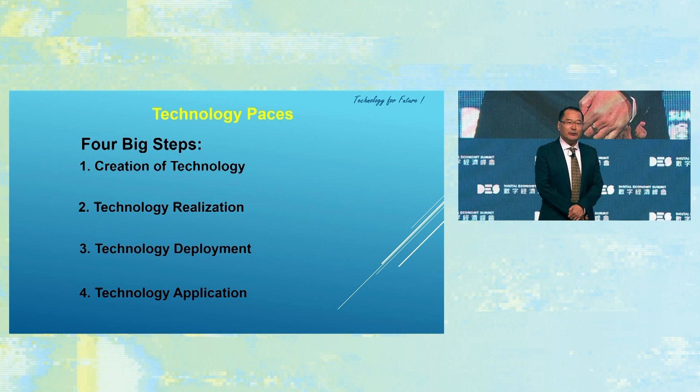Actually, after reviewing the technologies, we have creation of technology, technology realization, technology deployment, and technology application. The most important is the technology created by human beings. How to realize it is touchable and sensible. And deploy, how to deploy, so everyone will learn the technology more easily. And how about the application?

The first creation of technology is originated by human beings. From thousands of years ago, ancient people used stone as a tool for earning a living and fighting the beasts. Secondly, when coming to the farming stage, farmers used the plow and harrow. After this age comes the first industrial revolution stage, the first knitting machines, what we call the machinery stage.

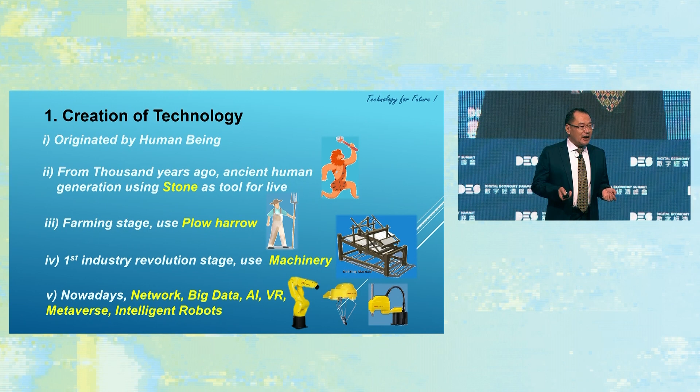But nowadays, what are we talking about? We're talking about the network, big data, AI, VR, and the metaverse, something like that, and the body of execution, what we call intelligent robots.

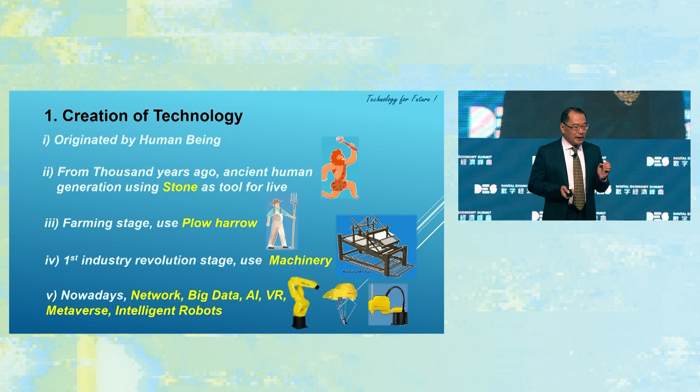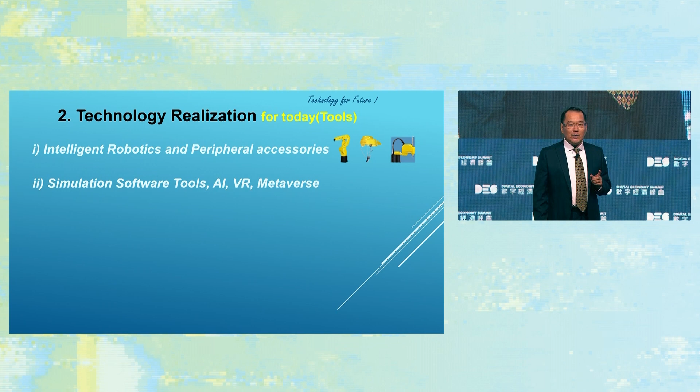Technology realization mainly depends on the execution of the body, what we call the robots and peripheral accessories. And how about the brain? The brain is the simulation software tools, for example artificial intelligence, virtual reality, VR, and the metaverse, which is now a very hot topic.

And by mixture of big data, like SCADA, which means the interface between the front-end body and the upper levels like MES and ERP inside a factory, a very big enterprise. And how about the digital factory right now, or digital twin? This is a very hot topic in the existing world.

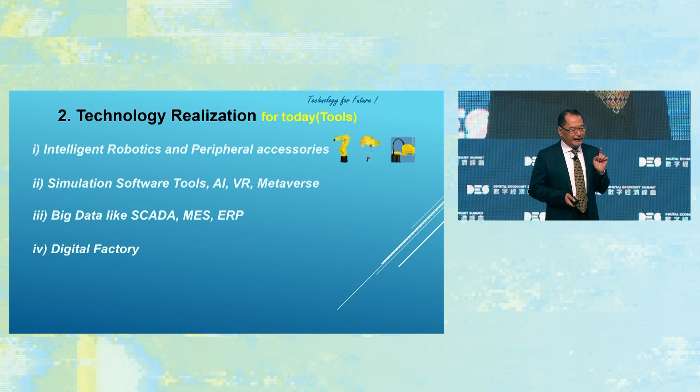And the above elements form Industry 4.0 and realize technology, becoming humane and laymen, touchable and sensible.

And how to deploy? This is very important. After creating something, we need to use it as a tool to help us make things much more efficient. Just like your mobile phone, iPhone is using the iOS operating system, and Android using the Android operating system. Then you can play Facebook, install WeChat, and install many other tools.

And then creating the technology application platform for laymen. The platform is very important because the professional guys already have the idea and expertise to create a platform for layman use.

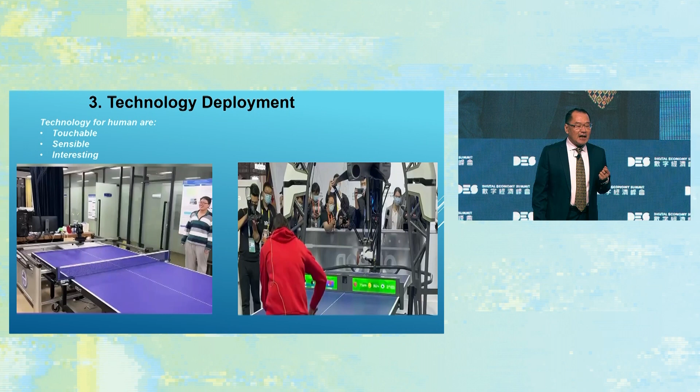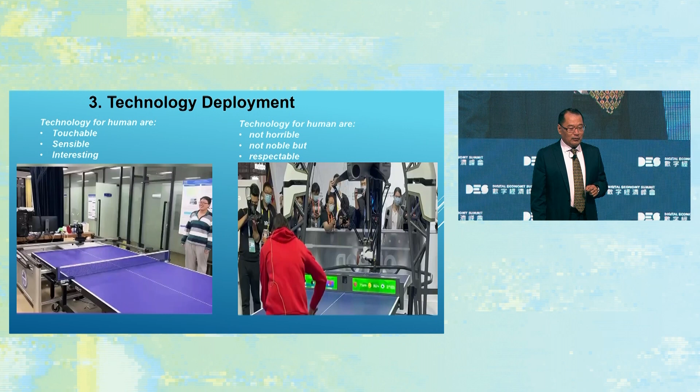How to make everything accessible down to the layman level? We just make the technologies touchable, sensible, and interesting to human life, which is very important. Making the technology not horrible, not noble, but respectable, just like doing ping pong, something like that. So we can make the technology interesting, merged together in your life.

Okay, and how to apply, in what way and how? First of all, we think about technologies that can create something human-like, the body is the hardware, and the software is the brain. The body includes the intelligent robot system. What is the definition of intelligent? We will discuss this later on.

This also includes AGVs, which you've seen before. Even in a restaurant, you can see robots traveling around taking dishes for you. Then there's computerization, the logical thinking hardware, making use of controllers and servers for database storage. The software is the brain, handling logical thinking and control programs, data manipulation, and now very popular is artificial intelligence, virtual reality, digital factory, and even the metaverse.

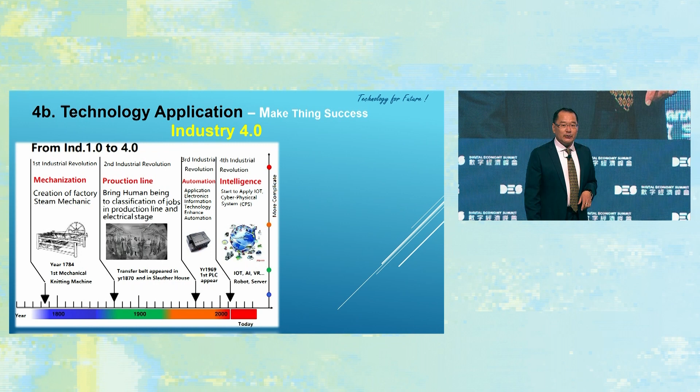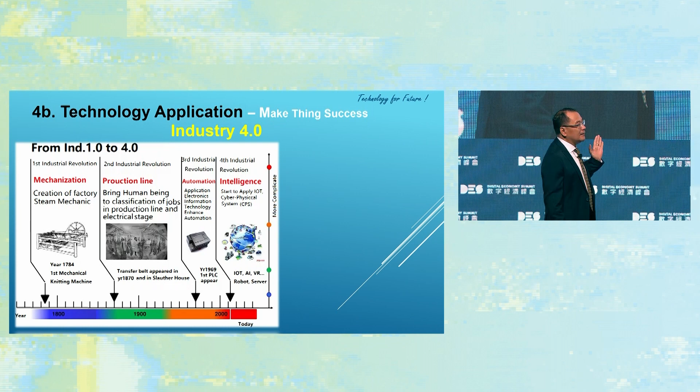So we can shortly review Industry stages from 1.0 to 4.0. You can see in year 1784, this is the first textile machines that appeared in the world, so what we call mechanization. Then after one century, it becomes the production line concept.

That means there's a group of people in the production line, sitting here to produce something, with job classifications divided piece by piece and linked up together. This is the production line concept.

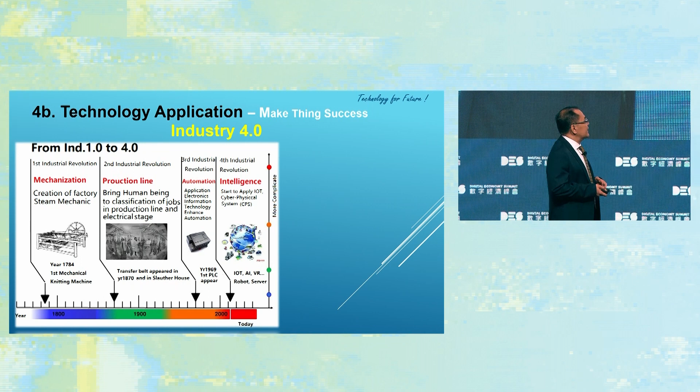And then after another century, automation becomes very popular. In 1969, the first programmable logic controller, which is the hardware of the brain, appeared. And then until now, what we're talking about is the Industrial 4.0 revolution, which is intelligence.

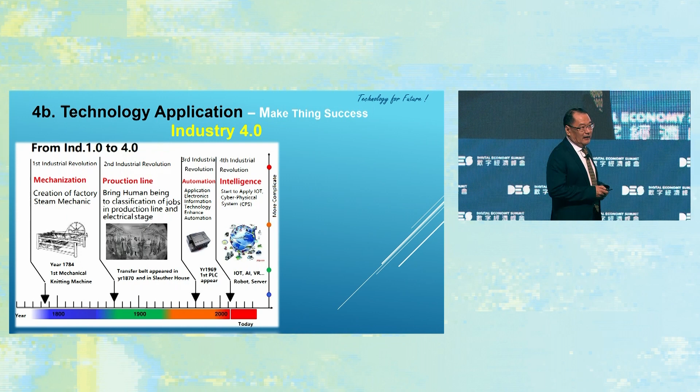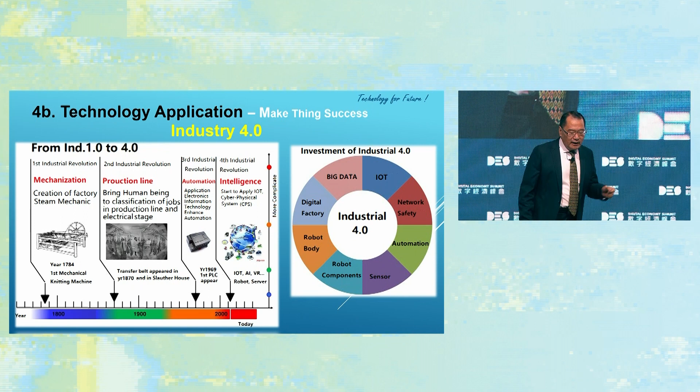We can separate the investment of human effort to assess and achieve Industrial 4.0 into 8 sectors: big data, digital factory, robot body, robot components, sensors, automation, network safety, and IoT. Someone all of us may know IoT, right?

So when we compete, we want to achieve something, or we want to have a plan to make a factory or some project. We need to follow the PDCA process to make things successful. P stands for plan, D stands for do, C is checking, and A is action - take action if after checking there's some error or deviation. How? Because we have the server and digital system, we can retrieve historical data and check the progress, whether there's a deviation from our desired targets.

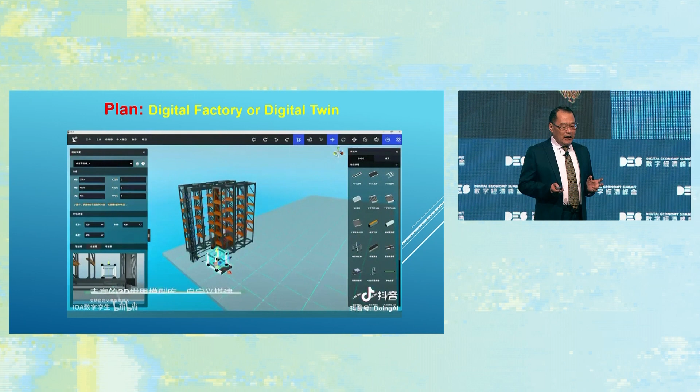So this is the digital factory. Actually, right now it's become a very hot topic, along with the digital twin. So we can make use of advanced software tools, and this is a digital factory software.

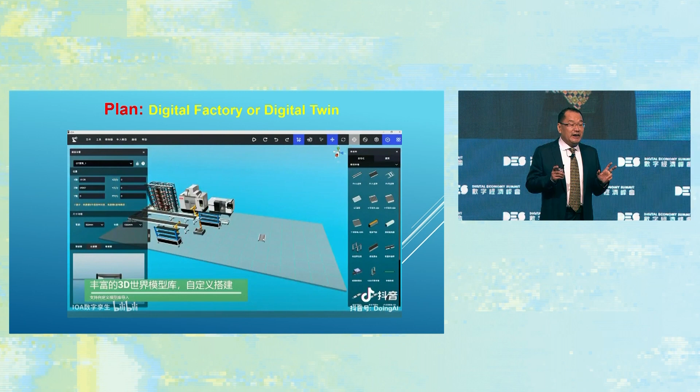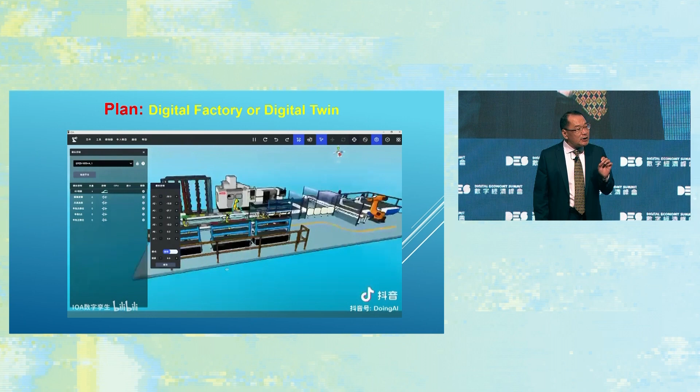Before any action, we need to plan how to do it. So this is the project, and you can see the factories with a list of how to arrange the robot system, how to integrate the warehouse system, and how to integrate the AGV system. After calculation by this software, we can utilize all the resources and make things much more efficient.

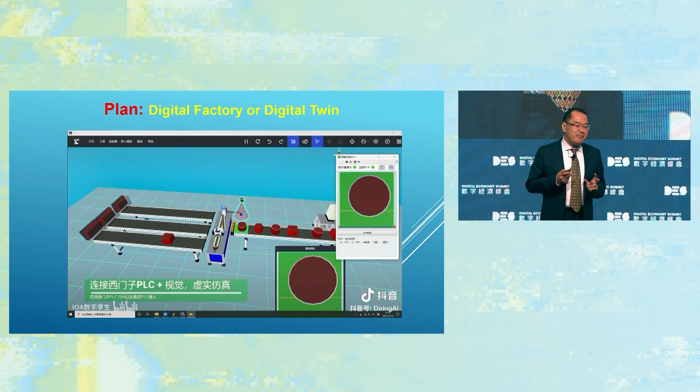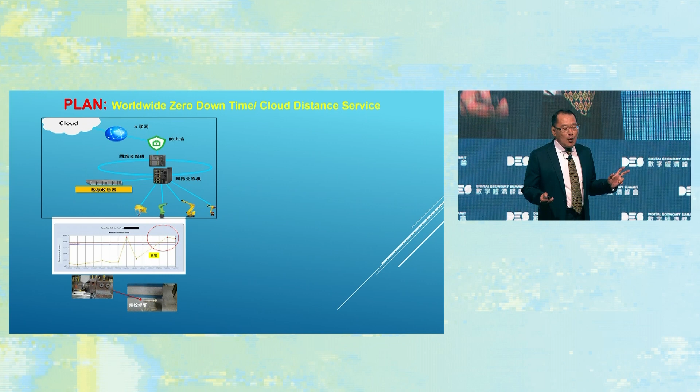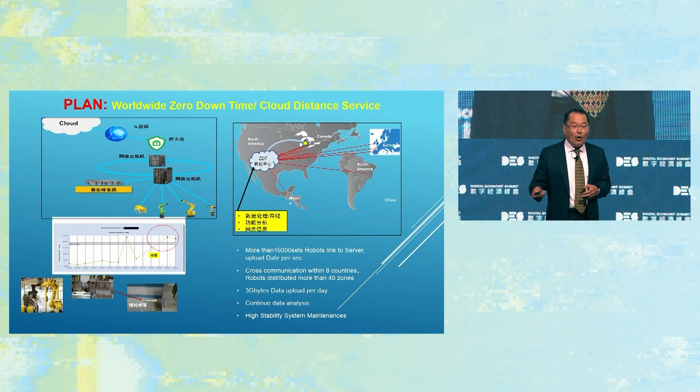Besides this, we have the global system, just like the cloud system and server system, to check our performance and what we do. We can even globally, all around the world, share information with the customer, or share the performance information of the material supplier all over the world by making use of the cloud system or internet.

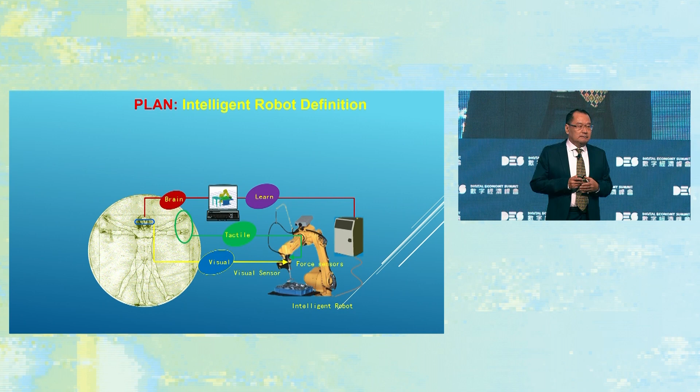And the intelligent robot, as mentioned previously, consists of the body and the brain, just like the human being shown right here. The brain can learn, and the robot can sense through tactile and visual means.

So we need some critical components to make this succeed. What's the intelligent definition? It's industrial robots with tactile force, just like a human being can sense something, and then execute, with adaptive and self-learning capabilities. They can adapt to the environment by choosing programming, and automatically complete more complicated tasks according to a programmed route.

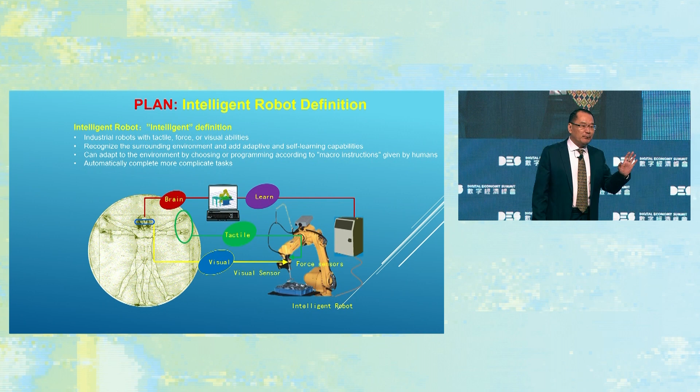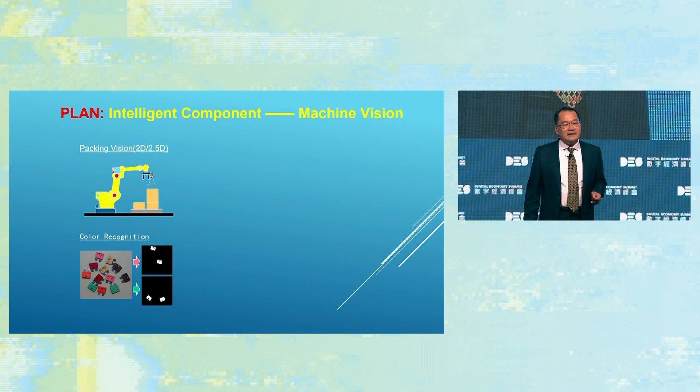Just like the first Professor Lee had displayed, some fantastic sensors are embedded in the robot, so we have another very critical component - machine vision.

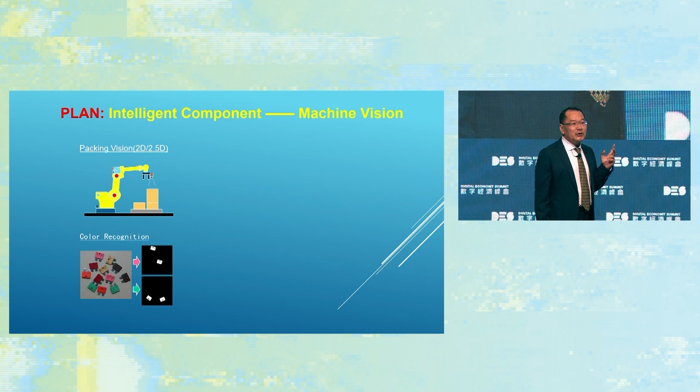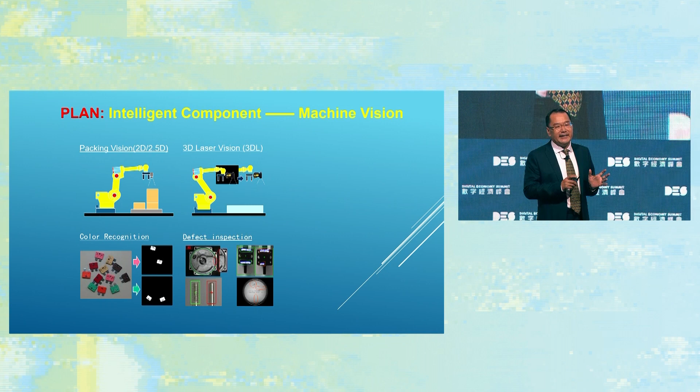It's a very critical part for the robot. You can see color recognition by making use of a 2D camera, and then 3D laser vision can check the profile of the object. You can use this object's profile and embed it into the control system and logical system, all automatically.

Also, the robot can make use of machine vision to pick up from chaotic supply materials which are disordered.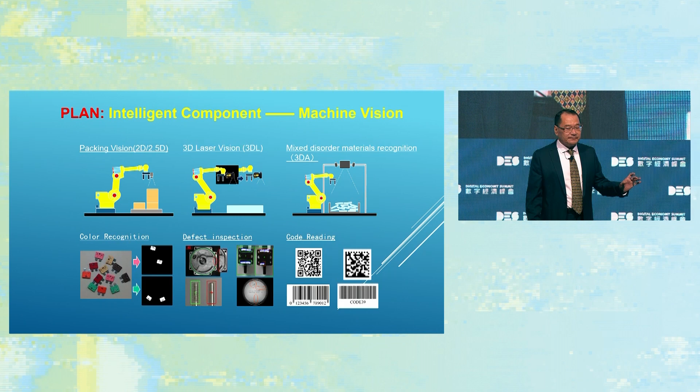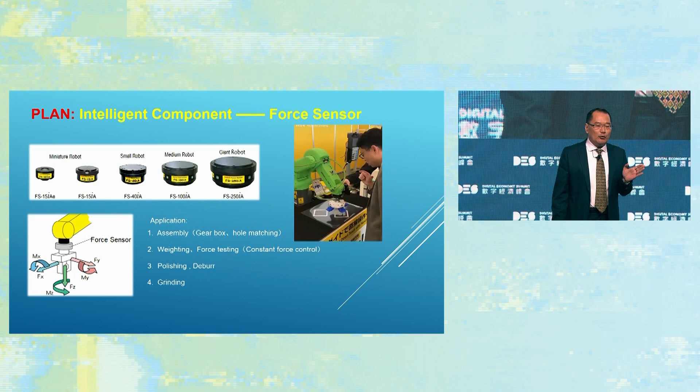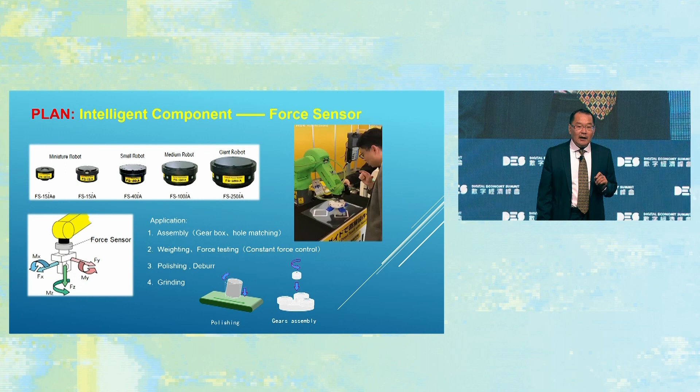And the force sensor is very important to sense everything. This is one of the very critical components inside the intelligent robot. It can sense force applied in different directions, such that it can perform a series of different job natures, for example polishing and assembly - very high precision assembly jobs.

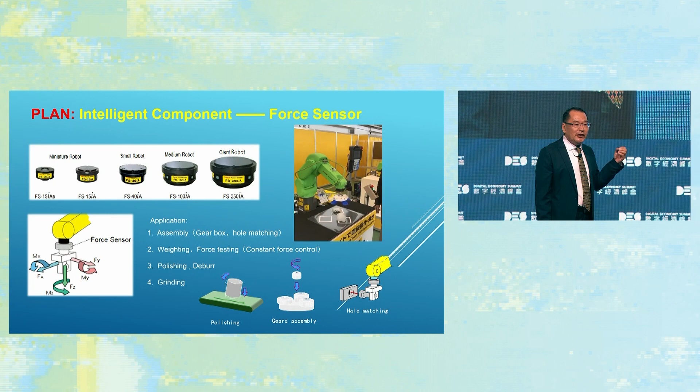And you can see, just like the first speaker Professor Lee showed, it has self-learning - after being taught by the human being, it will perform the gesture and job by itself. And most importantly, this can be integrated with software construction tools like SolidWorks and AutoCAD, and then you can use the robot's simulation software to program offline.

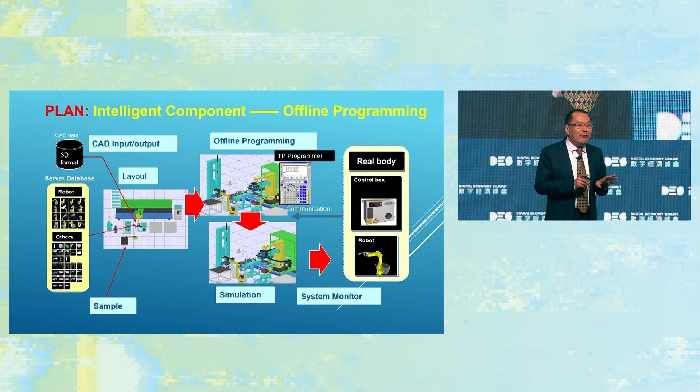I would like to take this opportunity to talk about the Fanuc robot arm family. I have a story - I've already taken part in automation projects for more than 20 years in electronic markets, parcel market, and metal market.

So let's take a look at the 6-axis robot. This is the traditional robot used in industry and commercial applications. The first one is the 6-axis robot, the second one is the Scara robot. The 6-axis robot and Scara robot are very frequently used in the market, especially in industrial applications.

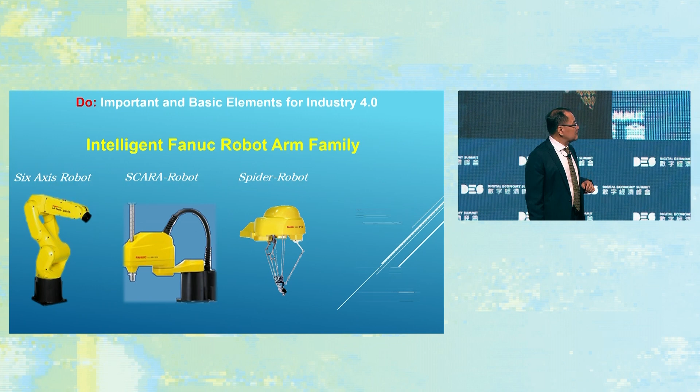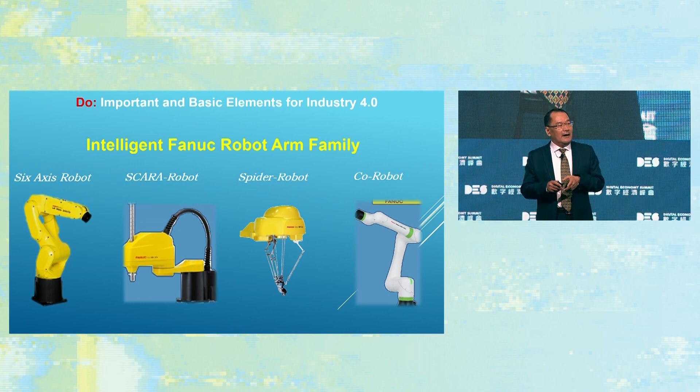And the spider robot, which is fast enough for the medicine and food market. And the co-robot has right now become very popular and very advanced because it has sensors distributed all over the body of the robot, such that the co-robot can do 80% of the job of the human being, and another 20% or 10% is carried out by the human being.

You know why I have been interested in talking about the Fanuc robot, but I'm not helping them to do any advertisements. This is my real experience.

10 years ago, one of my customers came to my factory and discussed with me. At that moment, it was the first time I touched a robot, and they told me they had 12 very old robots in their warehouse, already idle for 5 years, covered with dust. I didn't know whether it could be reloaded and reused or not. After I went to the warehouse and took a look at the metal plates, I saw the factory output date was 1996. This scared me too much.

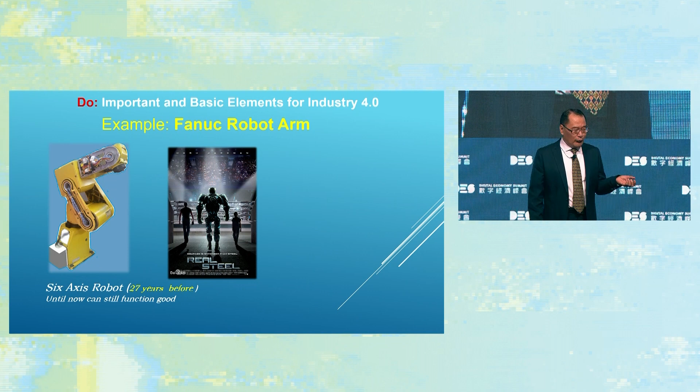However, after working together with the vendor's company for almost 2 months, when we plugged in the power and it worked again, it was just like the movie Real Steel - a rubbish training robot that can be realized by children. Well, now robots have become very beautiful and slim.

And then you can see this robot, after I make this alive, it has also become very high precision and the speed is very good.

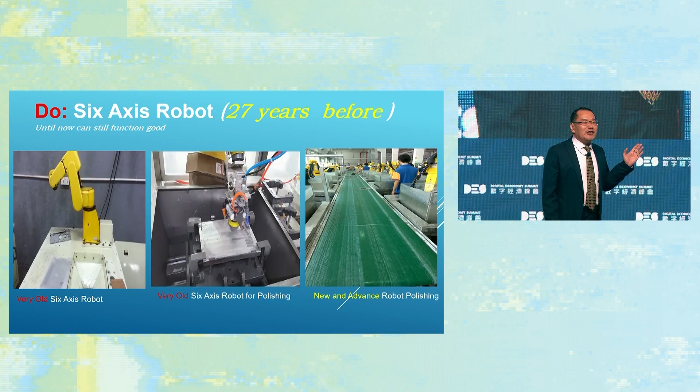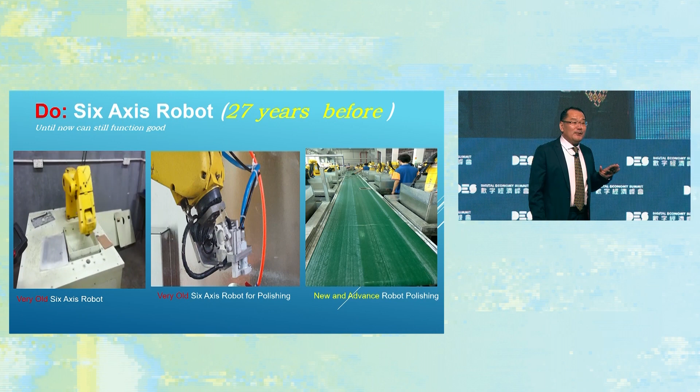After this, I made a bet with my customer: so long as I make use of your very old, 30-year-old robots, I can do some job for grinding, then you have to give me the PO. Finally, when we succeeded in the center part, you can see the video, performing the job very well. Finally, he asked me to help them improve the whole grinding process.

This is actually the notebook cover. The material is made of magnesium alloy.

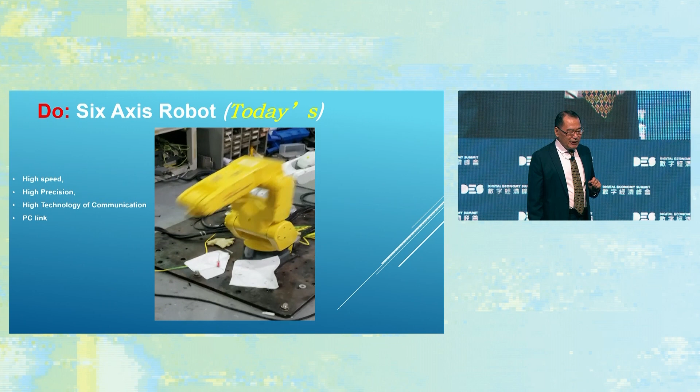And we can compare with existing robot performance, something like this. You can see very high speed, high precision, and high technological communication - it can communicate with internet and LAN.

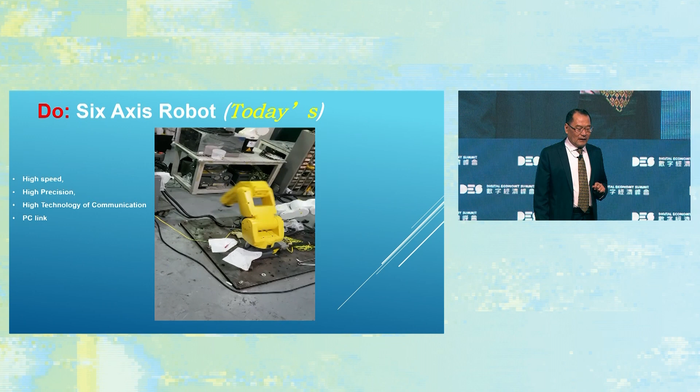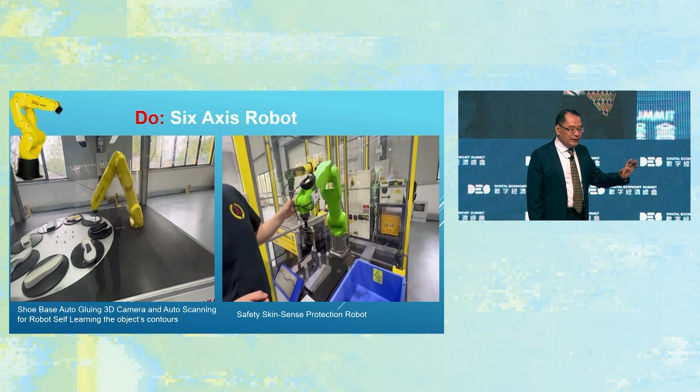And this is the actual application in industry, very popular and widely used. You can see on the left-hand side of the video the robot integrated together with a 3D camera, which can check the profile of each different part and then perform the gluing process.

And on the right-hand side of the video, you can see the green color - the green color means saving the planet and human friendliness. So when you touch it, for safety purposes, it will stop and pause for a few seconds. This is for safety purposes.

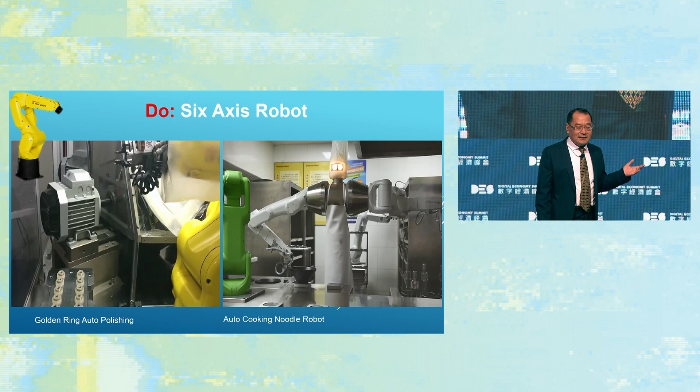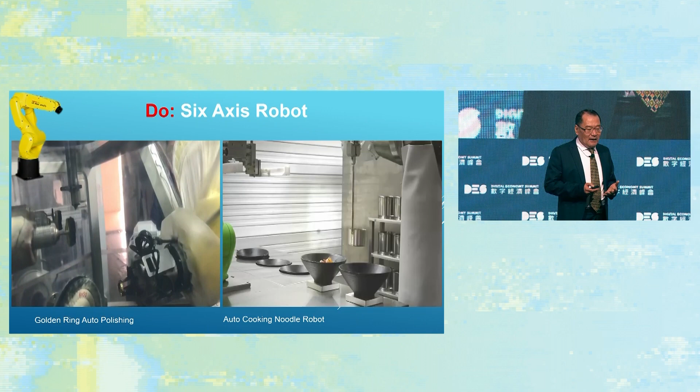Right now, you can see that the application of robots is very popular, not limited to industry or industrial enterprises - there's no limitation. You can also apply it in the commercial world, and you can see on the right-hand side making noodles. Actually, this one is in the canteen of the vendor's headquarters.

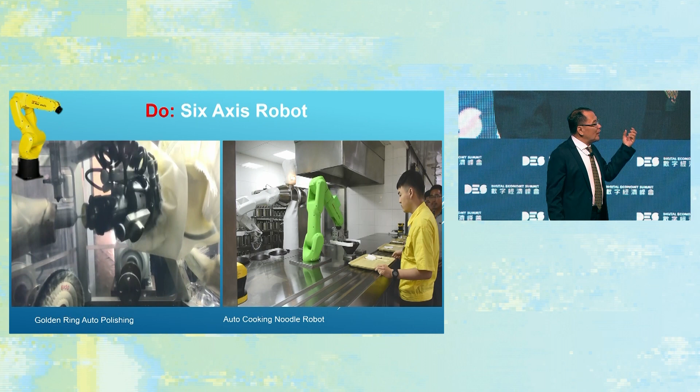Another one is the golden rings polishing I did 10 years ago. You can see very high precision, very fine-tuned work - it can carry out the job to replace one master of polishing. How long does it take to train one master of polishing? At least 2 years. So it's very difficult nowadays to find a human master of polishing to carry out this job.

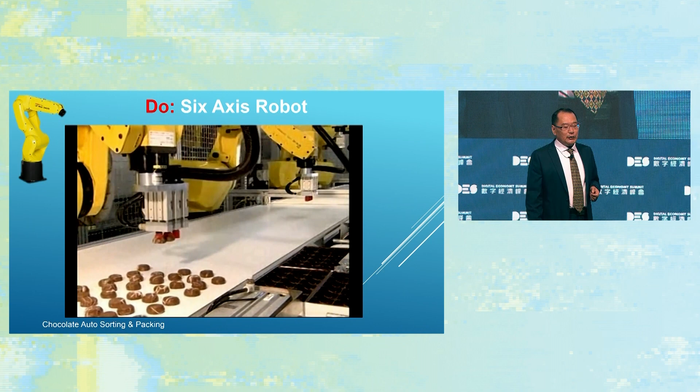Besides this, we can also use the 6-axis robot for packing. You can see chocolates with different shapes - maybe triangular, circular, oval. Every different shape can be matched together with a 2D camera and then picked into the desired packaging.

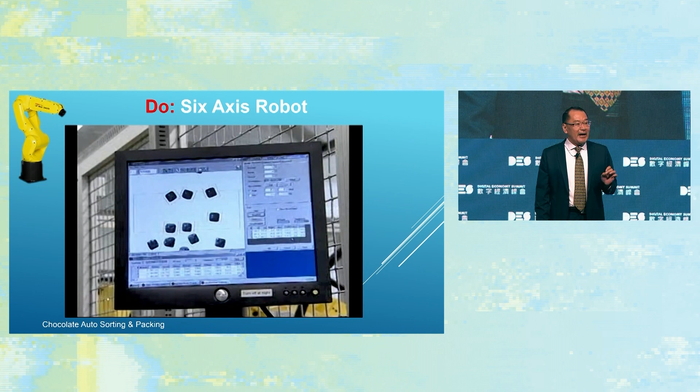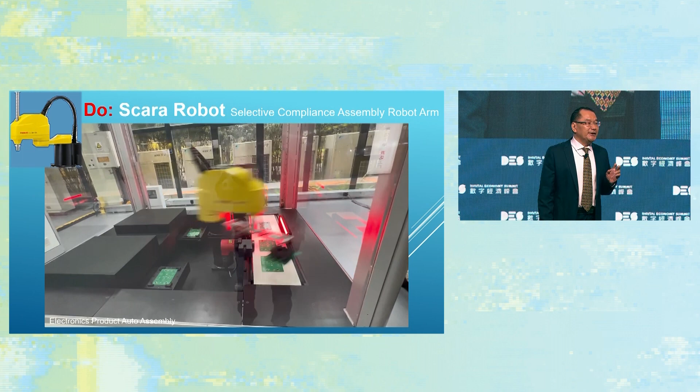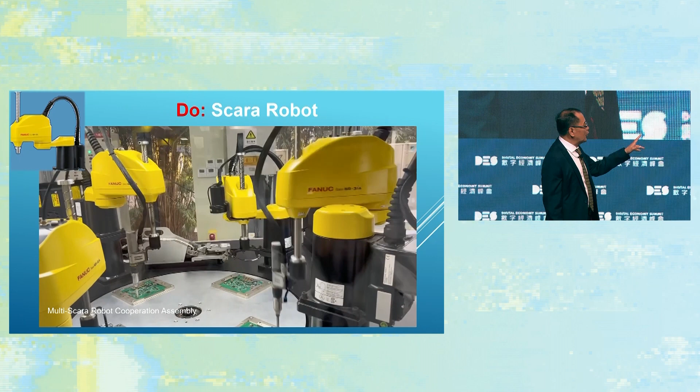And this one is the SCARA robot, which is very popular in the industry, especially for light industry and the electronic field, because its coverage range and radius is very wide, and the speed is very fast, working together with many robots. You can find the first robotic arm doing the screwing job, the second for the gluing job, the third for testing, and the last one for label sticking on the PCBA.

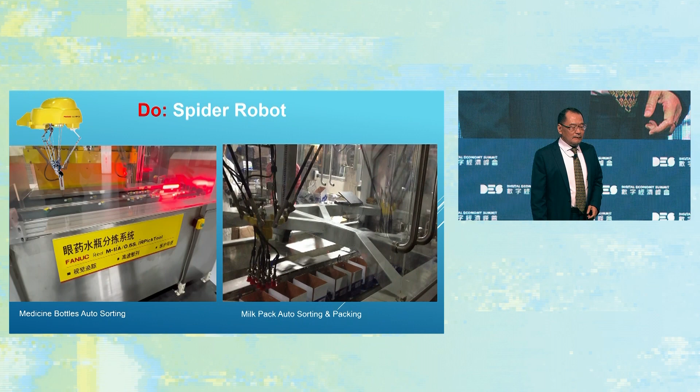Spider robots are also very popular in the light industry, for example in medicine, semiconductor manufacturing, and you can even find them used in packaging.

Someone will ask me, can I use a tailor-made automation line to replace the robot? Yes, but only if the PO quantity is very huge, like 1 million per month or per 2 months. But now, because of climate change in the economic market, many enterprises have very short PO quantities, maybe 1,000 or even a few hundred, so the changeover is too frequent. It's better to use robotics to help the industry provide a flexible changeover for jigs and fixtures to fulfill different model types.

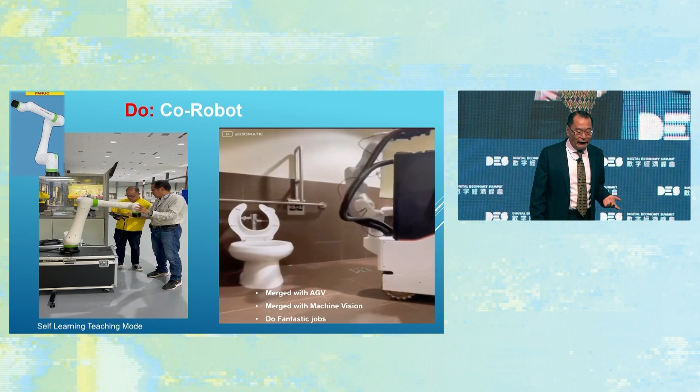Somatic is an autonomous robot. You can see that in recent years, especially during COVID-19, we used robotics for cleaning jobs in toilets or other dirty environments. The robot has a very fantastic self-learning mode, just like you saw in Professor Lee's presentation before.

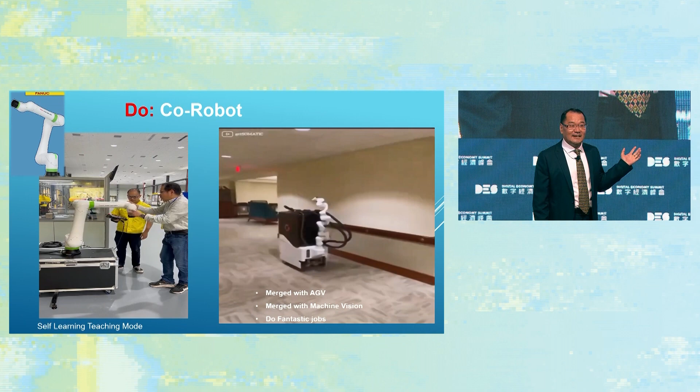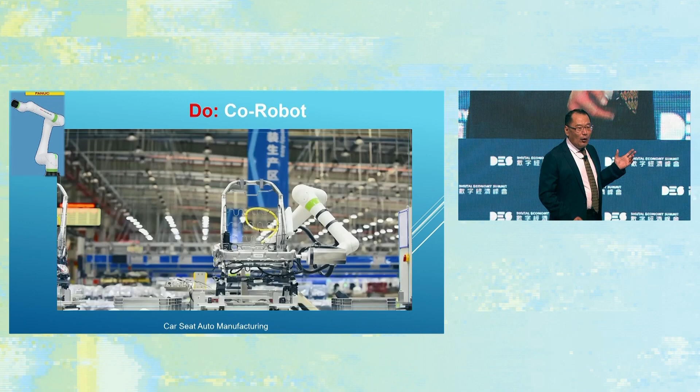What I introduced to you before is the robotic arm for co-robots. Right now it has become a very popular tool applied in industry. It can take on almost 80% of the jobs a human does, with the remaining 10-20% still requiring a human to help.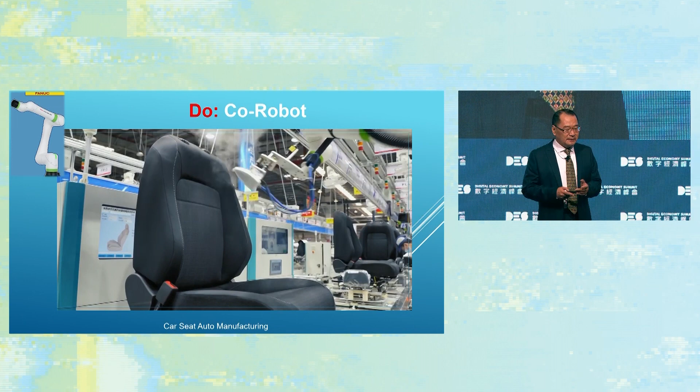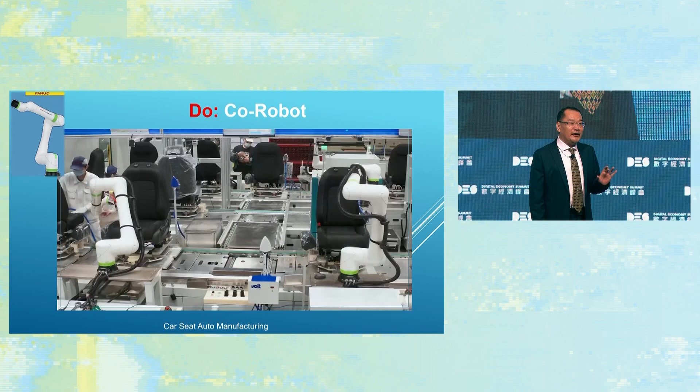So you can see ironing of the seat, this is car seat auto manufacturing. This is a production line happening in China somewhere.

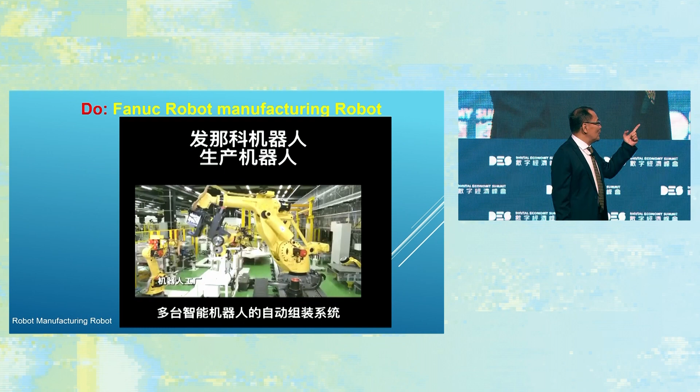At that moment, there were more than 260 robot models existing in industry environments. And these robots can even produce robots themselves, manufacturing everything from the component level to the complete set, all through automation.

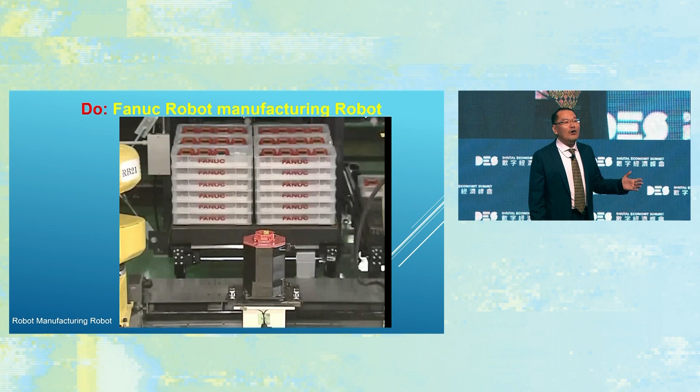So you can see the CNC machines, and every single part. There's absolutely no worker visible in the manufacturing field.

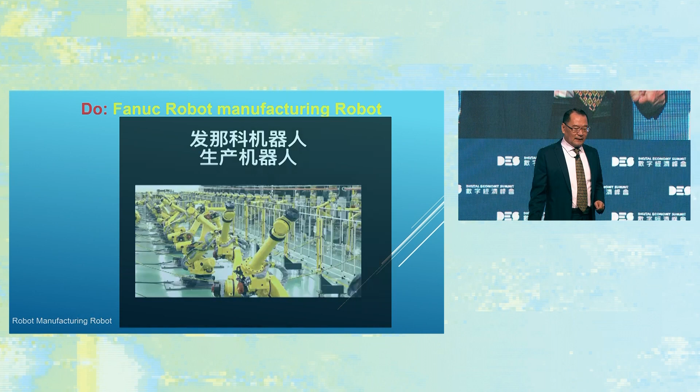This is actually, just like I introduced before with the SCARA robot, how different robots cooperate together, and every robot can also do the same job. For example, the 6-axis robot, spider robot, SCARA robot, and the co-robot.

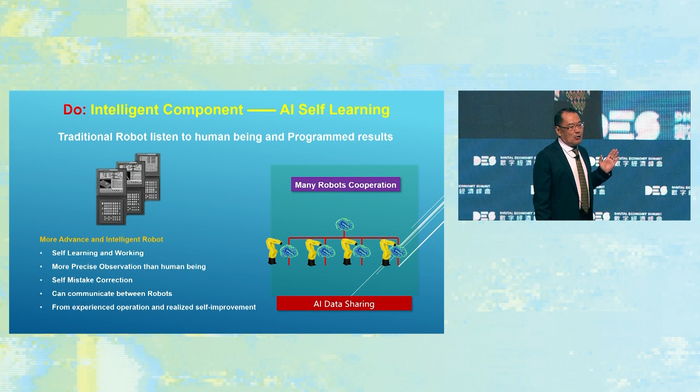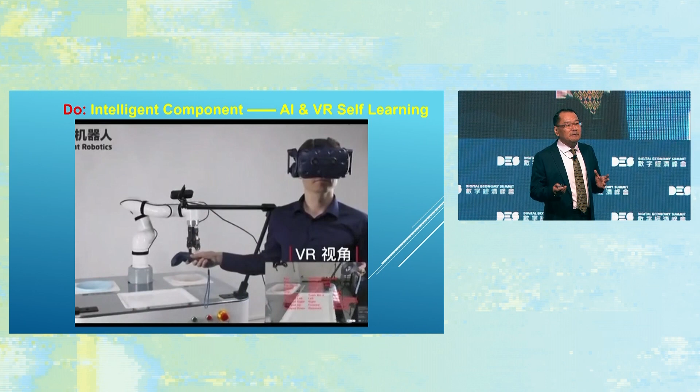And we can also use VR. In the coming days, there will be many applications for VR. That relates back to what I talked about at the beginning, technology deployment to the layman. For example, someone may not know the mechanism or professional details of the robot, but you can use this platform to carry out a decided job and complete certain tasks.

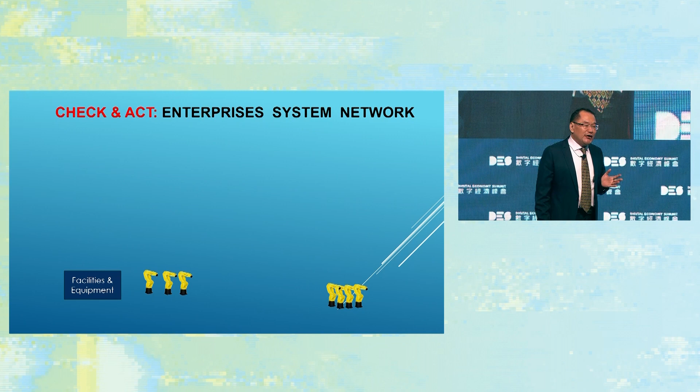Finally, there's how to check for deviation and error. We have a data flow for the whole factory: the body of robots executes certain jobs and tasks, and then there's a monitor system at the upper level server. The server checks whether everything happening in the factory or restaurant, the robot, the hardware, is executing well, or if any errors happen. Then it transmits all the information to the boss or management of the factory.

And how about Hong Kong's industrialization? As I introduced at the beginning, I am a Hong Kong citizen, and I've come across 30 years. I think from my student age, I went to the factory doing some summer jobs, and there were many kinds of jobs I could take. But until now, we can't see anything like that in the factory anymore.

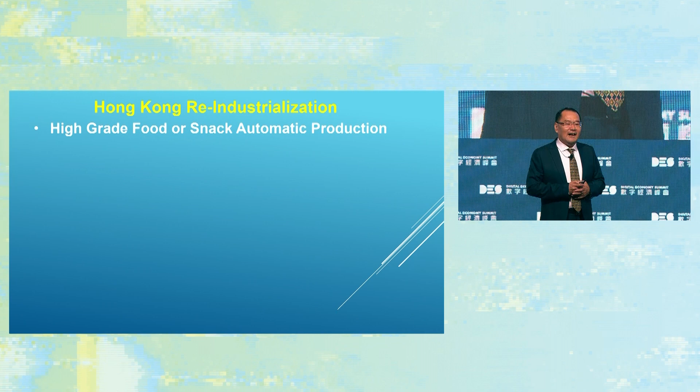But some nights, I think about whether Hong Kong can make some high-grade food or medicine through automation, just like this medicine which is very popular.

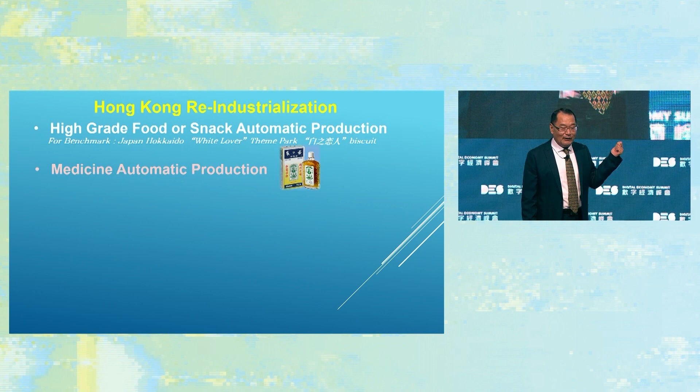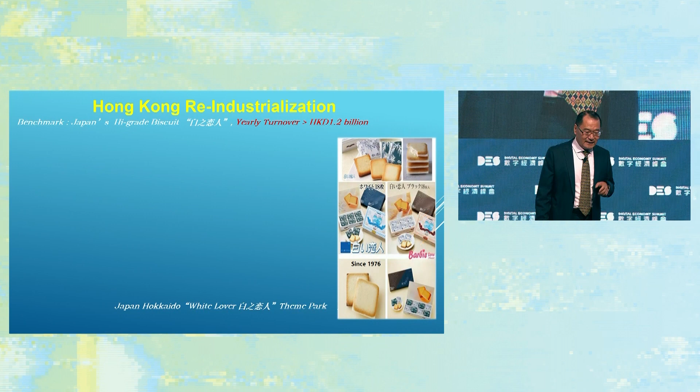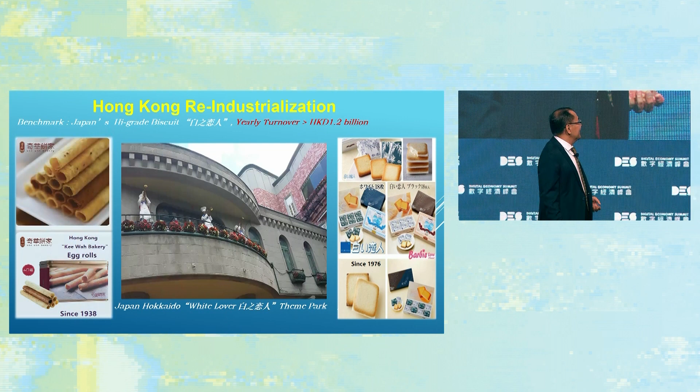We can take Japan's Hokkaido White Lover theme park as an example. They make biscuits with full automation, and the yearly turnover, from just a very small place, is more than 1.2 billion Hong Kong dollars. This is White Lovers, and this is the castle, a very beautiful place, but small, just like this area. Actually, I like Kee Wah Bakery much more for the egg rolls.

And actually, how about Hong Kong if we create White Dolphin Love biscuits? You know, Chinese white dolphins always appear in Hong Kong's sea waters. So one of my ideas is making white dolphin love biscuits.

And the future development of technology, you can see everything can be automated. That's all for my presentation. Thank you very much.